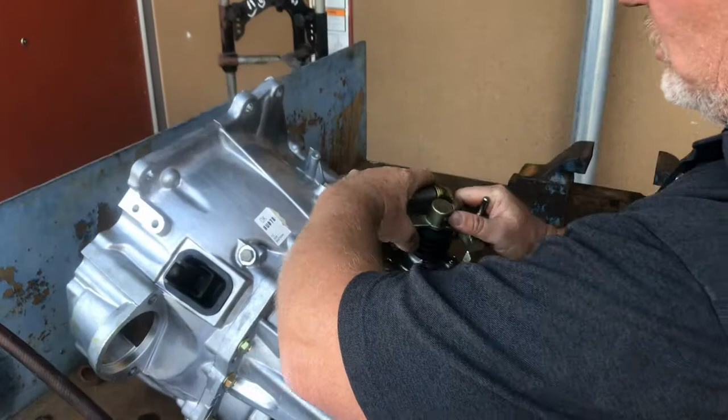So it's important before you start on any transmissions, identify neutral. So neutral on this one is up and down, and then you have your H patterns. So you go all the way up, you should be able to engage 2 gears. Let's see. 1, 2. You go down one more rail. 1, 2, and then down to the bottom. 1, 2. So we have all 6 positions.

Okay. So in order to start on this transmission, or any transmission, you got to make sure your shifter assembly is in neutral. So we're ready for that. This transmission right here has the shift fork and the throwout bearing connected. You can see how the manufacturer lubricated this. Okay, a lot of this is from my fingers, but you just got to pull this out. Okay, pull the shift fork out. Let me pop it off.

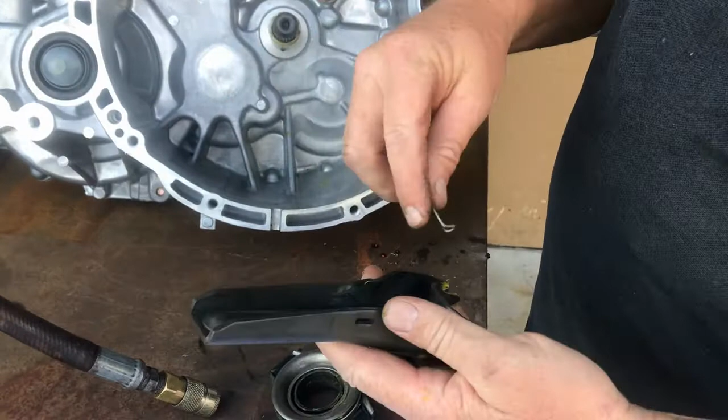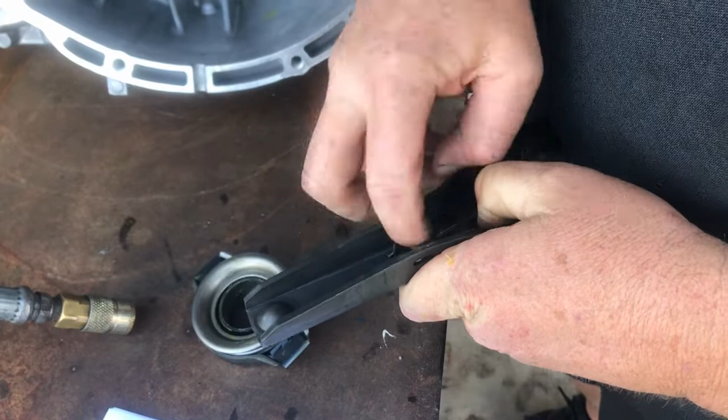There we go. And then the one thing I always worry about is students losing this spring. Okay, this spring is really important because that's what locks onto that ball. So I'm going to make sure that spring goes right inside so we don't lose that spring that holds the shift fork onto that pivot ball. Okay, so it just pops right in here, this ball.

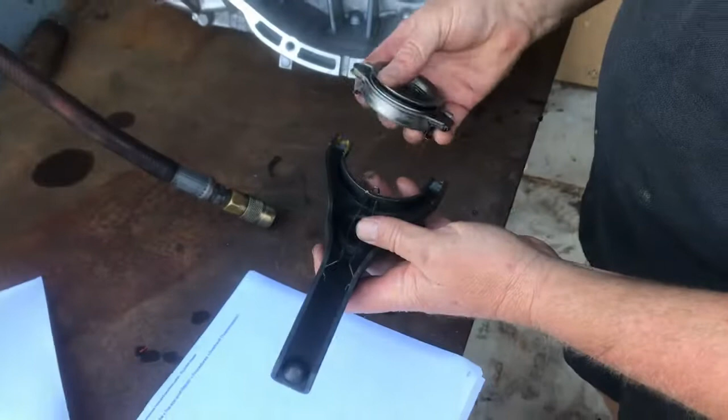Okay, and then the throwout bearing has 2 sides. So the side that will face out towards the clutch is this one. Okay, so that would be facing this way, and it just slides right on right here. And then we'll just put that out of the way. Yep. When it stops rolling.

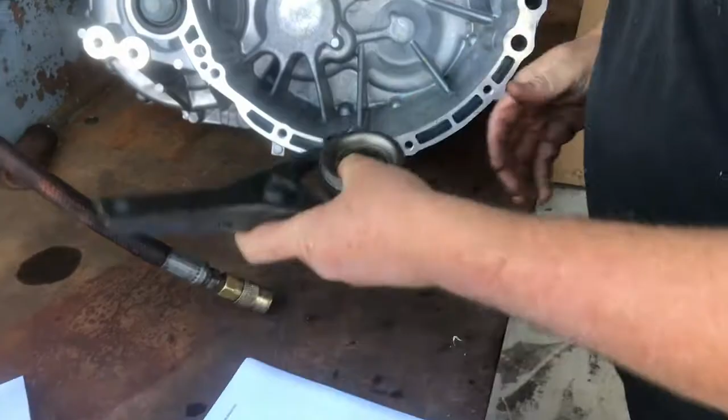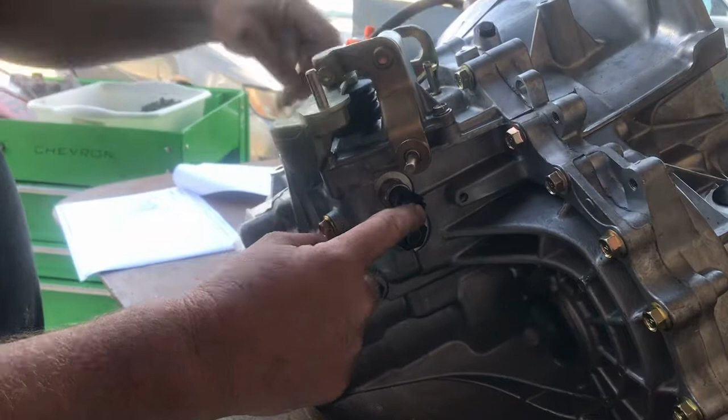So we have to identify some other things about the shifter assembly. There are stops. So this is like just a little pin that holds it in place. We also have a detent right here. We have a neutral start switch right here. On the top side, this blue one, this is your backup lights. Okay, so backup lights, starting switch, and then these are a detent, and then this is a detent up here. So detents are where you're going to have the spring and the check ball.

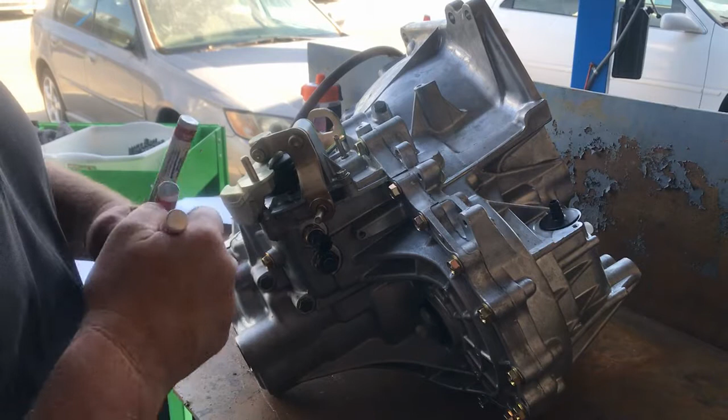We've got to make sure we identify these. And the way we're going to identify these is we're going to actually use paint pens. And so everything that comes out of this one is going to be yellow. Okay? Everyone that comes out of this one is going to be white. Because if you mix up the check balls and the springs, they're not always the same. And so that would affect the way it works and the way it feels. So this one right here is going to be blue.

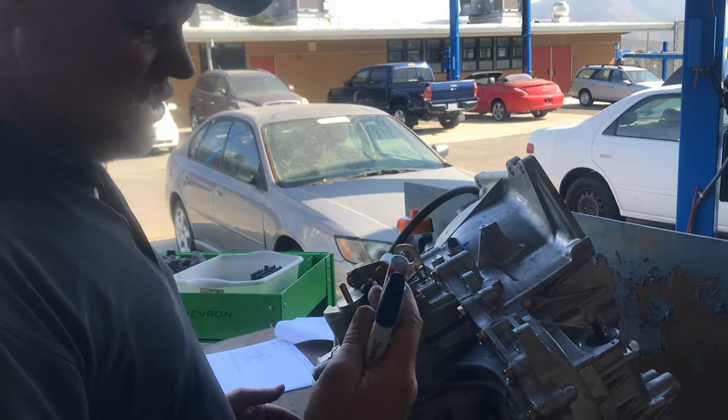Okay, we're going to use a paint pen a lot on this transmission to identify different synchronizers, different shift rails. These are really useful for the first time you ever take apart a transmission that you've never done before. You need to identify it with some kind of marking system so you know direction and you know which pieces go where. So really good, useful tool.

So now we're ready to take off that shifter assembly. So I'm going to use a 10mm socket and a 3/8 impact gun. And make sure we're in a neutral position right here, and we are. Okay. Now I will say I'm going to have to move it out of the way to get this one bolt. Get my safety glasses on. Okay. Everything's locked tight on this, and that's pretty common for transmissions. So, because it's locked tight, sometimes they're a little hard to take out.

Okay, so I got that done. Now I got to take out these other pieces. So I'm going to go ahead and grab a big wrench, take out my detent right here. So this one actually is, they're referring to this one as a shift check. That's what they're calling it, a shift check. Okay, so you can see it's a spring-loaded check ball, and on the instruction sheet it's right here, and it's referring to a shift check, and we're on step 3, remove the shift check and stopper bolt.

So now we need to remove that stopper bolt. 14. Yep. And I already have it loose, so screw that out. Okay, set these aside. We got to remove our, that looks like it is the park neutral position switch. So let's go ahead and get that. It's 21.

Let's get this out of the way. This is just a switch, an on-off switch with a little plunger. You could check it with an ohm meter if you wanted to.

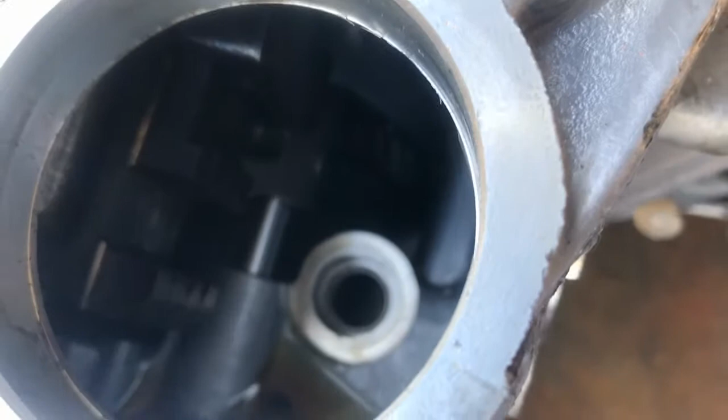Because this is in neutral, I should be able to lift this straight out. And there we go. This is actually what engages your shift rails through the gates. If you look down inside here, you'll see - let me get a screwdriver so I can point them out. These are your gates right here where I'm putting the screwdriver through. When you're shifting, you're moving up and down between each of these gates, and it looks like there are 1, 2, 3, 4 levels. I actually only shifted through 3 levels, so there was one I didn't find. Anyway, there are 4 levels here, so 4 shift rails.

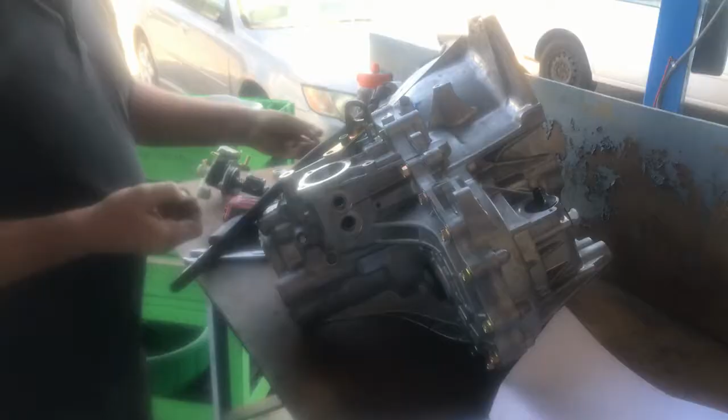Whenever I do a transmission for the first time, I always make sure to check that there are bolts of different lengths. To keep track of your bolts, and so you don't have pieces rolling around, screw the bolts back in - that way you know where they go.

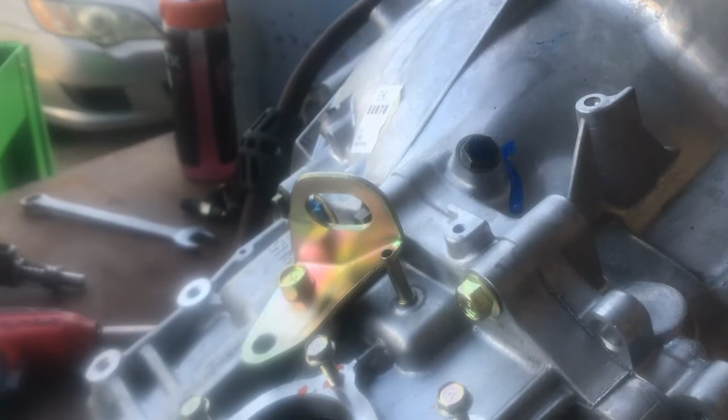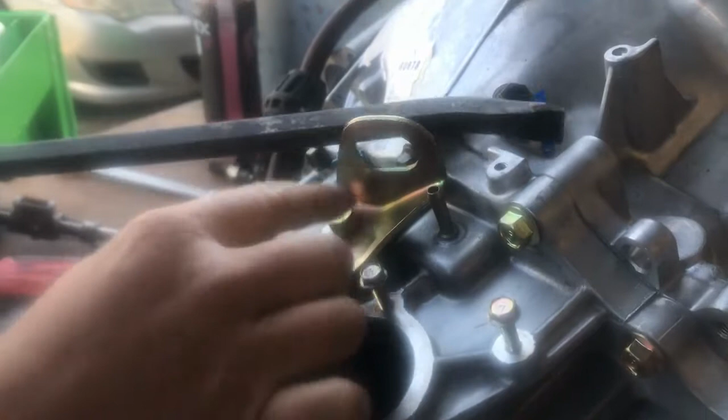I'm going to remove this bracket. We're going to have to separate these two cases, and I want to show you something - there's a really good leverage point, a prying section, right here with this bracket in place. So right here, let's see, yeah, right here we could maybe press. If I can't get this thing to separate, I might want to put that bracket back on so I can separate it, but I need to get it off to get out the bolts.

I'm going to screw that bolt back in and take off this other switch real quick. Need to use a socket. Let's see - no, that's not going to work. Hit stop or something. There we go. Okay, that was a little tight switch. Get that wrench off.

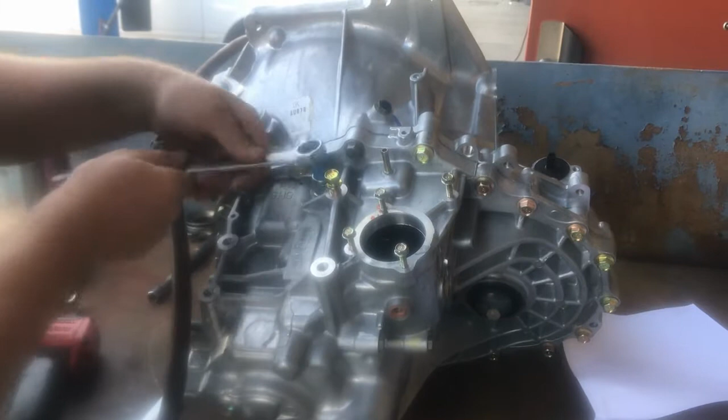We should be able to just slowly remove it. Again, this is for the backup lights. It's a regular on-off switch, just like the other one, with a little plunger on it. Wow, a lot of Loctite on this.

Okay, there we go, sticking this all in place. We're good. Now let's go see where we are in the instructions.

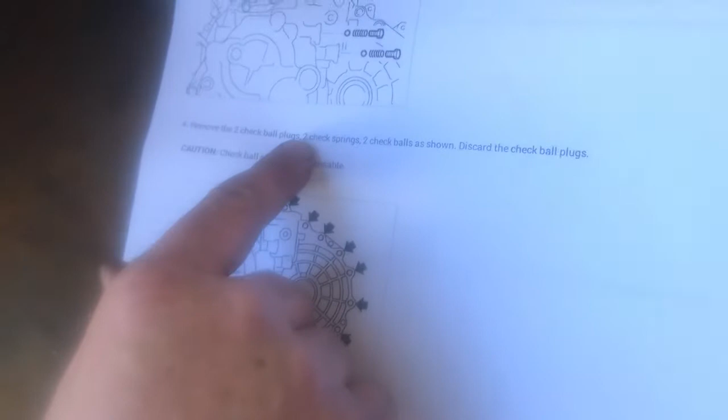I'm going to turn the page. Now it wants us to remove the check ball plugs, and the two springs as shown. Of course, if you're doing a rebuild, it would have you discard these - different parts depending on what the kit is. So we're going to remove those now.

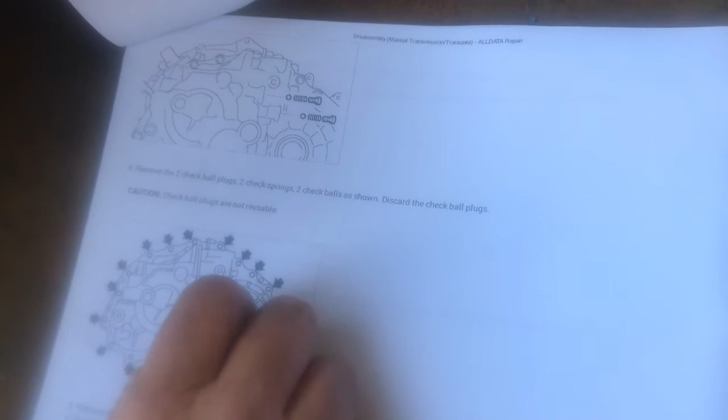It might be a 14. Yep, 14. Do one, and then I'm going to mark the ball and the spring with paint. And then we have the spring inside. Hit stop real quick.

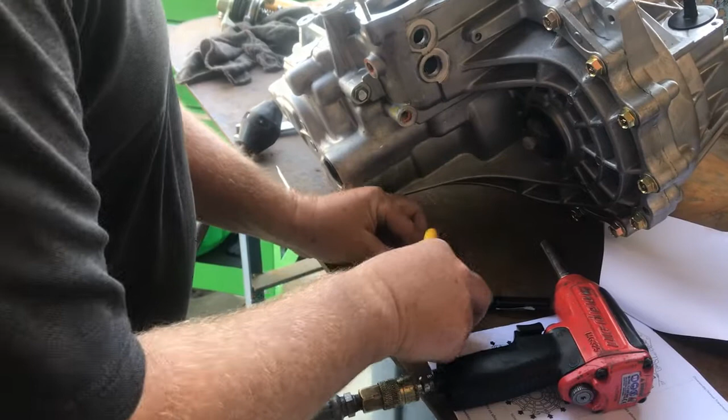Magnets are your friend when you're dealing with transmissions, because you can pull those parts out. Again, I want to mark this - this was the yellow one. I have yellow, so I'm going to mark these springs and the check ball too. Then you should put this somewhere safe, set aside so it won't roll around - somewhere in a rag.

So now let's do the next one. Get my magnet, my check ball - this one was the white one. That detent right there. You know, paint it white.

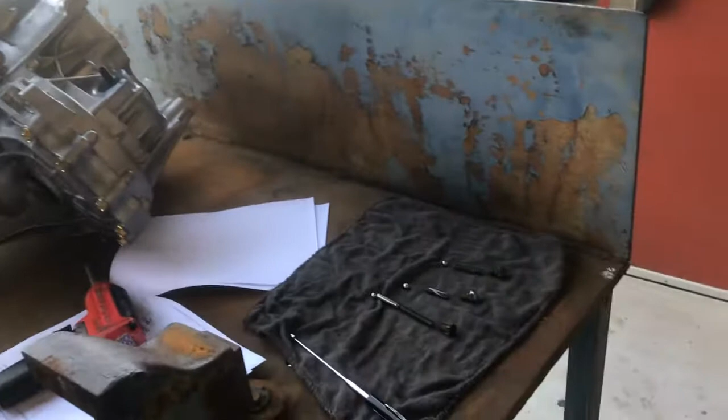All right, now we've got to do this top one. See, you can look and see - oh wow, look at that, it's blue from the manufacturer. Got lucky on that. But you'll notice - let's see, there we go - it's a little bit different of a setup. Now we're dealing with an interlock system in addition to a detent. This is definitely a different thing, and this is where students don't pay attention to the detail, and then they get the springs mixed up.

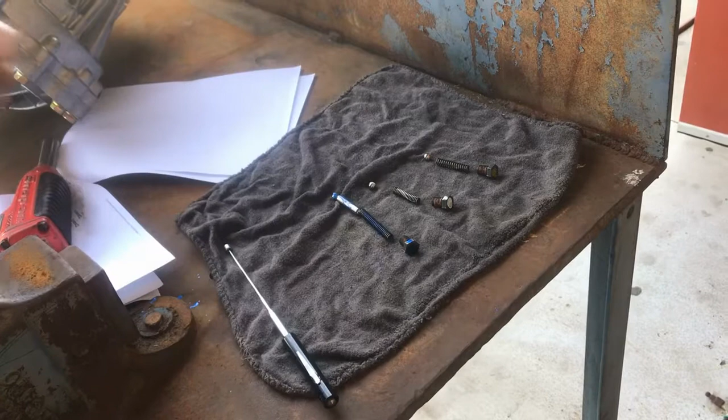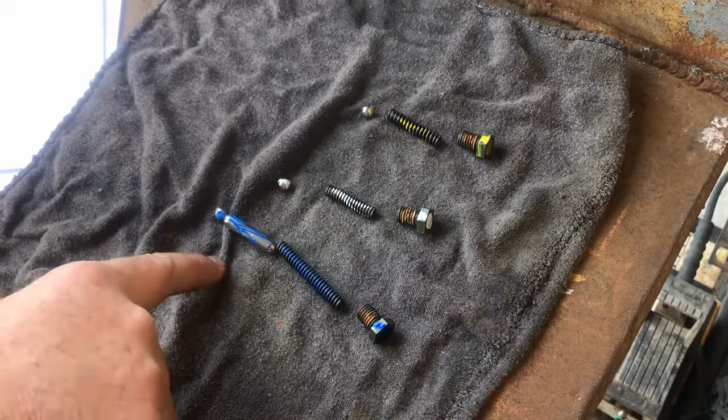They forget where this pin goes - almost don't even have to do that one. It's really important that we're consistent with our identification system with transmissions, because these are calibrated springs. This one's the shortest, this one's the medium, this is the long one, and this has the interlock pin. Really important we understand that.

Okay, we're ready to go ahead and start pulling this apart. I want to show you organization - organization is everything, because you're going to be taking apart a transmission that has probably 400 pieces inside it. You've got to have a method of identification, a method of keeping things out of the way, and a method of making sure things don't roll around, because the check balls will roll around. Rags work really well. Another thing that works well is tackle boxes - you could put these in the little slots used for fishing tackle. All kinds of different ways to organize.

And we are on this step right here: remove the transaxle fixing bolts as shown, and then we're going to remove the cover plate.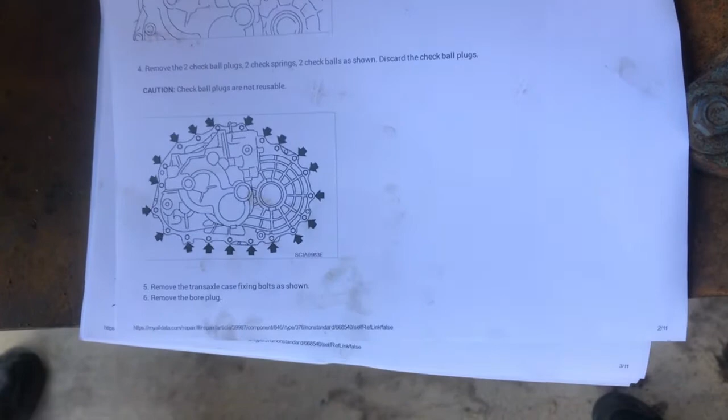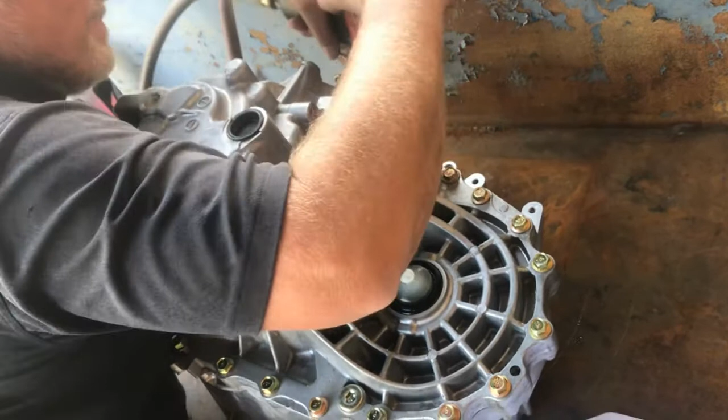One bolt here. There we go. An extension.

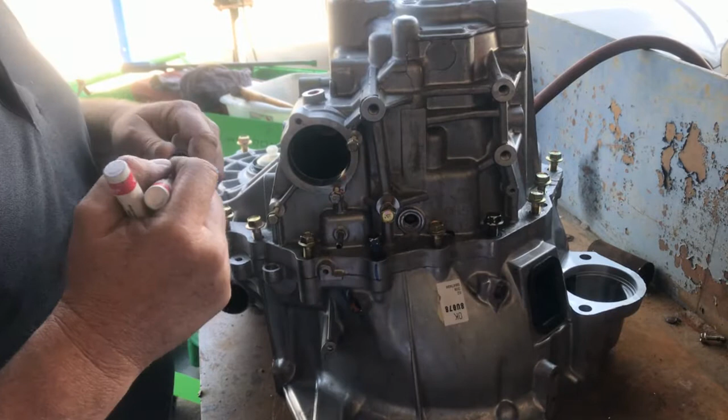On the back side of this transmission, this is really important I show you. I have two bolts that are a different color than the other bolts. Most people won't pay attention to that, but I do, because it's really important we get that right—those could be different length bolts. Again, use paint pens. If you think you have a different bolt, mark it. They might be a different thread or different length, I don't know, but there's a reason those are a different color or kind of bolt than the others. So just mark them, then pull them out and put them in a pile.

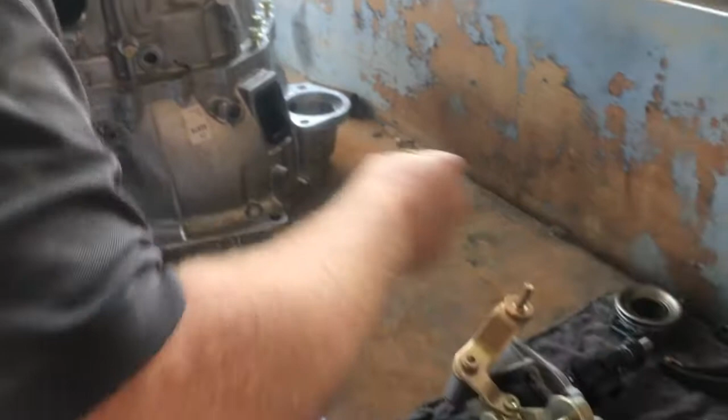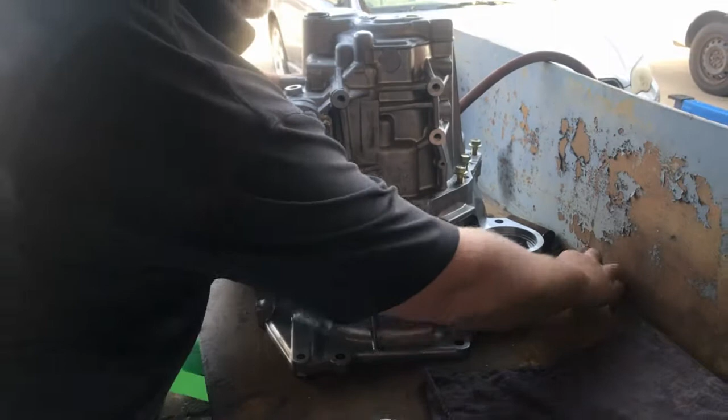Have an organization to them. I need another rag, looks like. So I'm on my second level. I might screw these back in, which is another possibility we could use, like I did with this one right here. So we could screw these back in.

Now it says to remove the plug. This is a plug right here that we've got to remove. I want to take a screwdriver and hit that in there. Might be able to—yep, I can twist it and get that out. And then inside here is a snap ring, okay? That's really important that we identify that, because that's one of the steps.

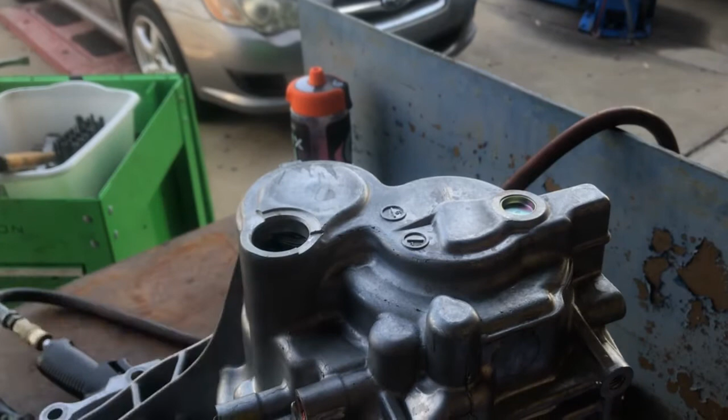If I turn the page, the next step is: while spreading the snap ring of the main shaft rear bearing located in the plug hole, remove the transaxle case. So I need to take a pair of snap ring pliers in here, and I need to—there we go, you heard it drop, okay? So what happens is when you expand that clip, the whole shaft inside here drops. So when you're going back together, you've got to support that input shaft underneath here. You've got to put a block or wood or something to hold that up so you can get this clip to go back on.

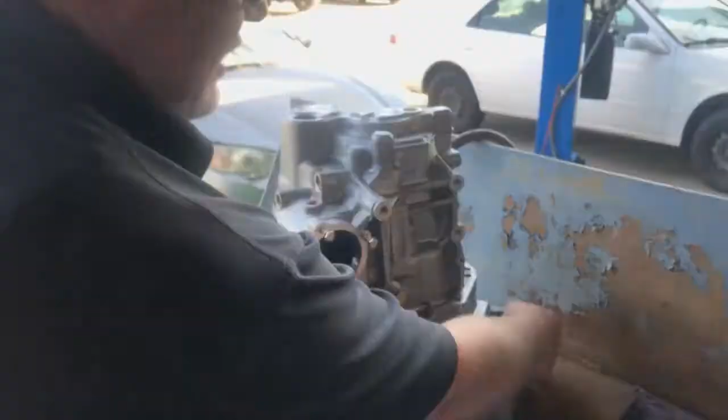Now we're ready to start separating this case. Let's see, here's a good place right here. Good. Never put anything where it mates the surface, okay? So we got that. Might need to—nope, that's still loose, so that's good. Spin this case around, find another spot. Right here. Again, you never want to pry inside here. Once you dent this aluminum, it's over. And then we should be able to go.

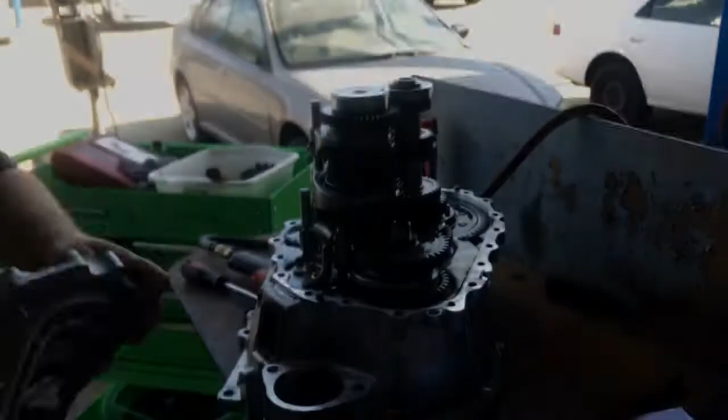There we go, and there's our shifter assembly, and any shims that fall out. These are really good to keep, by the way. Any shims that fall out—in this case, here's the shims—we've got to make sure those shims go back in the same place. So this one has a shim, that has a shim, no shim on the final drive here on this side.

So we have three clusters. Here's a cluster, here's a cluster, and here's a cluster. This is my main shaft, okay? I'm going to take this shim and stick it down inside the case right here, right where it's supposed to go. And then I can put this out of the way.

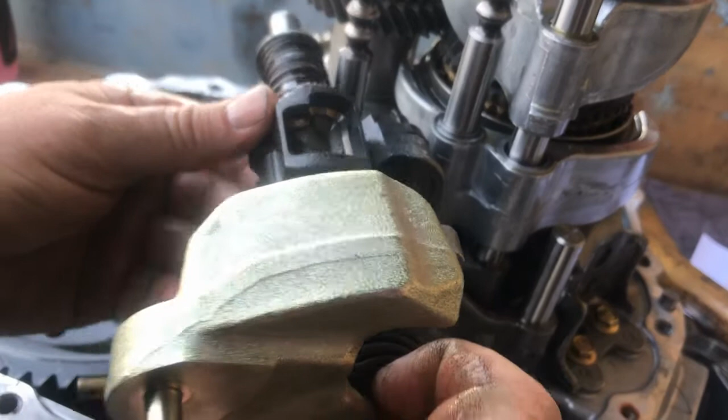Rolling. So right now we're in neutral because all the gates are aligned right here, okay? So when you put all these gates back together, this is what it needs to look like—it needs to be through. The reason why is when you put this shifter assembly in right here, you're going to be sliding this lever down inside here like this to install your shift mechanism. So this is how we engage different gears, by moving this and then sliding each gate up and down.

This is actually a 6-speed transmission. Reverse is over here, so we have a reverse gear right here. I'll shift it into reverse—that's reverse, you can see this one dropped up right here. So this lever goes up, and it moves a mechanism that pushes that down. Let's shift it down into neutral. Okay, so we're back into neutral.

This is first and second gear right here. You could see first and second gear because if you look inside, you've got a small gear turning a large gear. That small gear turns this large gear, so then first gear would be down.

That is first gear. The next gear is this one right up here, engaging this gear, so then second gear would be up, right there, that'd be second. So this one is down is first, up is second.

So let's go back. Okay, and we got to get it all in neutral because remember, we cannot move multiple shift forks. Third and fourth is right here. Okay, so we go up to this gear.

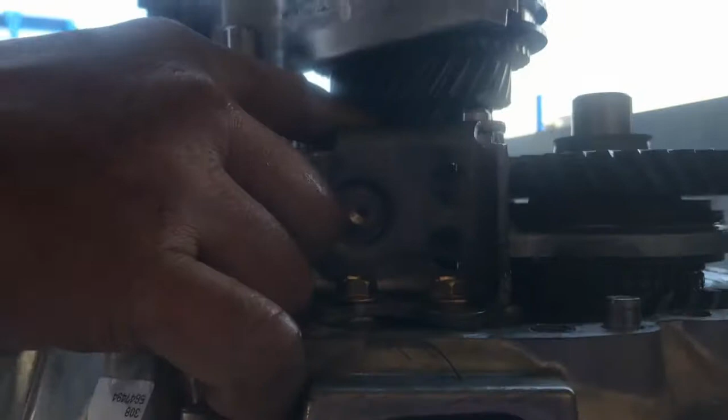This gear right here only transfers the power from the input shaft to this other cluster. So it's almost like an idler gear, this gear right here where I have my hand. Yeah, right here, this is like an idler gear, okay? So keep that in mind.

Third gear is actually this one. This is fourth gear, this is fifth gear, and then this is sixth gear, okay?

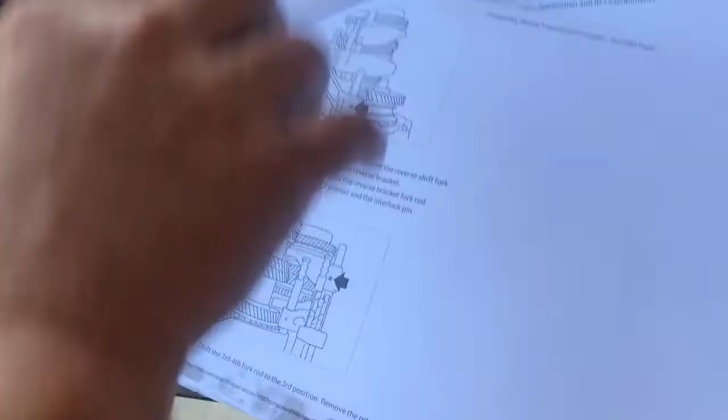So it's going to tell us to, as we follow the directions, shift it into third gear, which means we want to move this shift lever down on this one. Let's see, and sometimes it's going to take a little bit of force. With your transmissions, they've been apart before, so it's very possible that you won't be able to move these because these have all been taken apart.

So that is third gear right there. Neutral would be up. So third gear, fourth gear, neutral is in the middle, fifth gear, and then sixth gear it's going to be...

And this is where I need to use the... let's see, I want to be able to move that up. There we go, right here.

There we go. So it's all a matter of getting everything, all the synchronizers and the dog teeth aligned. So that's engaged right there. Okay, and let's drop - actually it's not all the way engaged. Let's do it one more time. There we go.

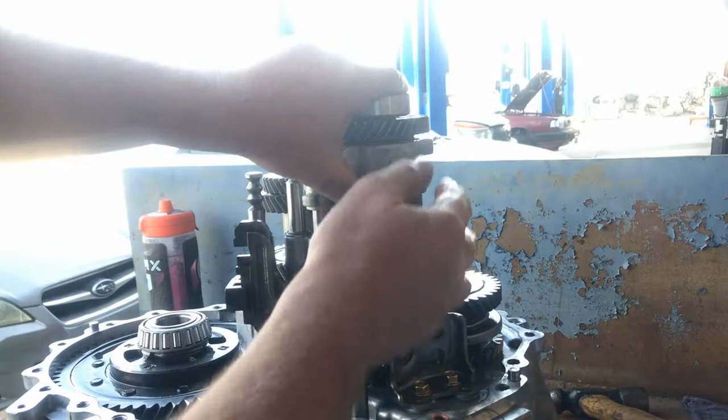So you can see how this gate right here is up. So this gate's up, this shift fork's up, and the synchronizer's engaged. So put it back into neutral, drop it down. So we always start with neutral, and then we go up and down depending on what shift fork we're moving and shift rail.

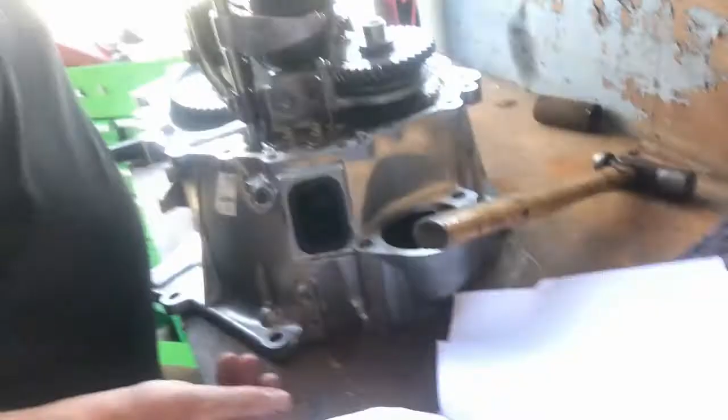So our goal today is to remove this, okay? So we're going to follow the directions as we go along. The first thing we're going to probably be removing is... we're not going to do all these steps for the bearings and the races, so we're going to skip all that, okay?

All right, so now we want to remove the shift lever right here for the reverse, remove the bracket and bolts for the reverse lever. So it looks like that we have maybe a, could be a 14, nope, might be a 12... yep, 12 millimeter. Get my air hose.

There's 1, 2, and then we can remove this whole bracket assembly. Let's see, should be able to. There we go, and then this will come off.

So, and you could see that this little knob right here goes on over the top of this rail. There is a little keeper here that goes inside the shift fork right here. Okay, so that goes inside the little lever right here, and we're going to set that aside like we've been doing all our other parts.

Okay, again, so we have an option. We could put these back in, or we could keep them separate, or we could mark them. I'm going to put these back in. You can see all the Loctite that are on these, and then we're going to go to the next step.

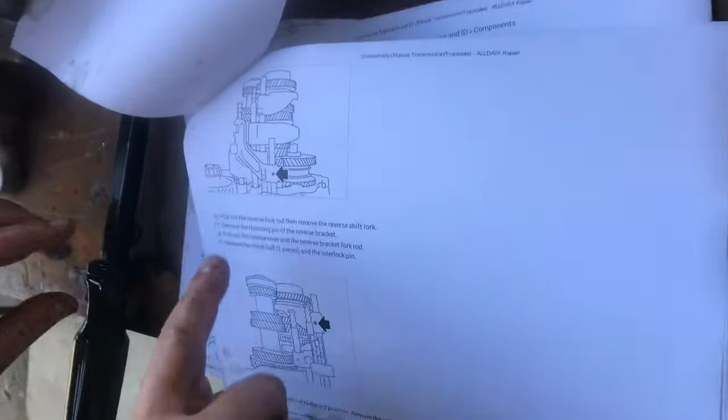So what it's referring to is, here's our reverse. We're going to actually pull that rod out right here, and then we can remove that shift fork.

Now here's the problem, everything is directional, so I'm actually going to use white on this reverse one - or this is the blue, sorry, I'm going to put blue here, and I'm going to mark the shift fork. This is top side, this is top side, okay? So I know now if I flip it around, this is going to be the way it's going to go, okay? So direction is everything.

So the next one I'm going to do is white, and then the next one I'm going to do is yellow, and then maybe I'll get the black pen.

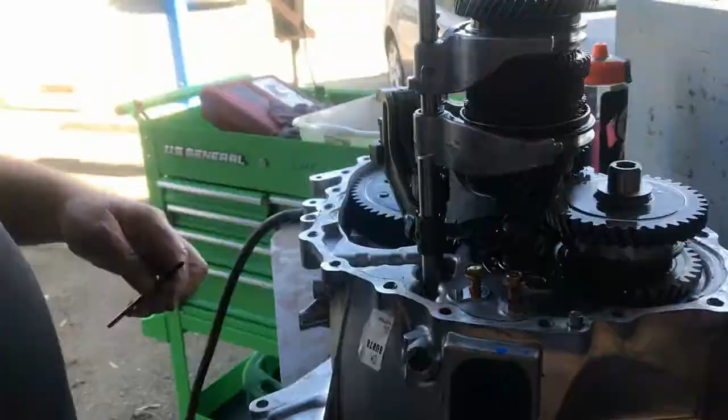Okay, so now I need to drive out the roll pin. You can kind of see I already have it kind of pulling out right here. Okay, you see right on top of my finger. So we're going to take this pin out right here.

Keep track of it, because you don't want it to go shooting somewhere and you lose it. And then always be aware these ridges are really sharp.

There we go. And I did exactly what I said not to do.

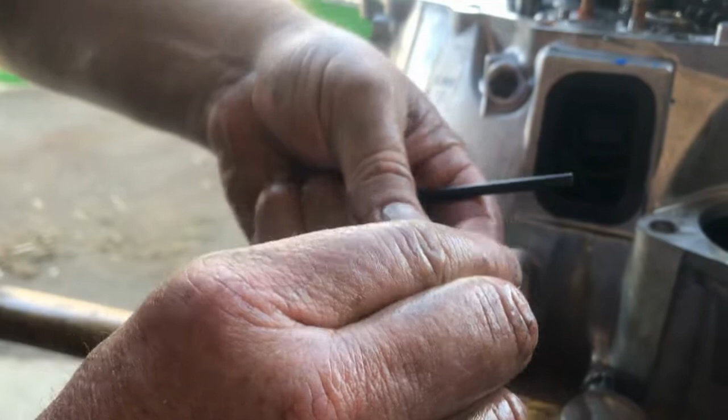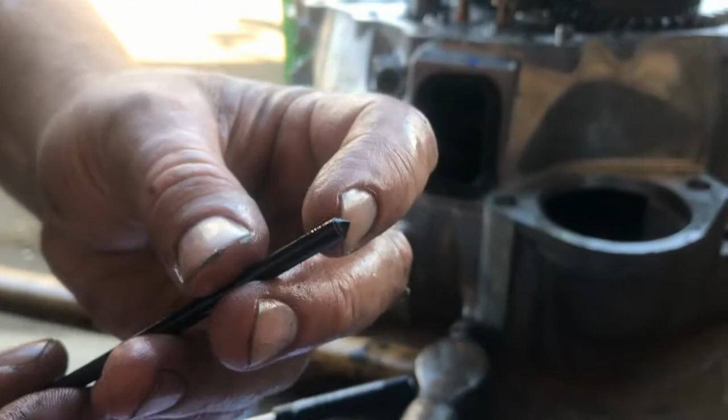This is where the magnet's really good to have, whether it's a pocket screwdriver magnet or just a regular magnet. It's a two-piece design roll pin, so one goes inside the other, just be aware of that. I'm going to put that over here for now, but I want to show you a drift punch, or the punch I'm using. As we get further, the sizes get more pronounced. These are like for roll pins, or you could use them for center punching too. Really cool set to have.

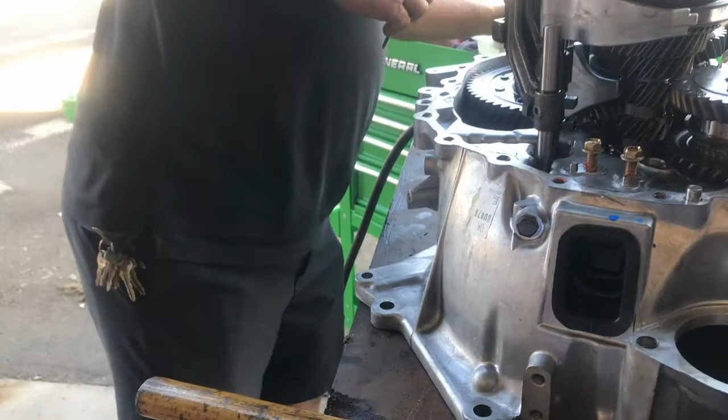Now I got this out, so I could go ahead and lift this shift lever off. But again, direction - I know this is related to that, and this is all reverse, so I'm going to mark this. That's the white one - I guess you should keep track of your pads. So white, blue, and blue, so I know how this all goes. Okay, so I'm going to go ahead and remove this if I can.

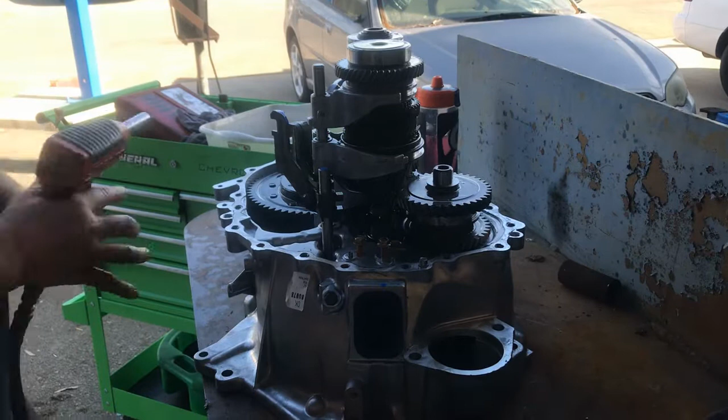Let's see, go ahead and- okay, so I need to really talk about this. I was trying to pull this out, and I can't pull it out, which means I need to do what I did with this: lift the pin up. By lifting the pin up, we can remove the pin and this bracket assembly.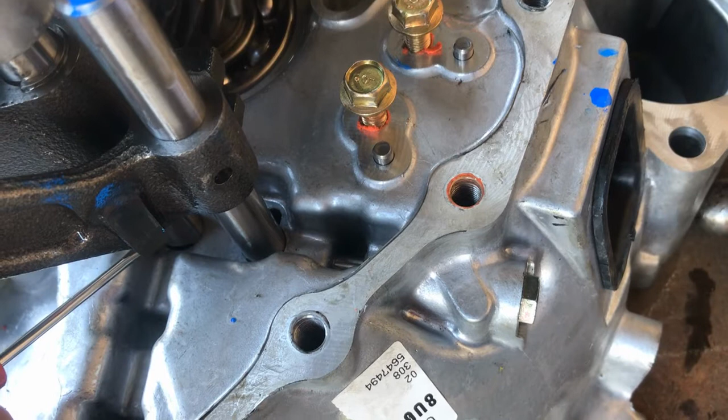Now here's the problem - this is the detent right here, and this detent is really complicated. If you look inside, and I'll use a pocket screwdriver, this detent has a spring right here, then one of those rods, then a check ball, then a shift interlock pin. Between this rail and this rail is a shift interlock pin, but there's a check ball inside this rail, a check ball inside this rail with another locking pin. So it goes: pin, check ball, pin, check ball, pin, and then rail with another pin.

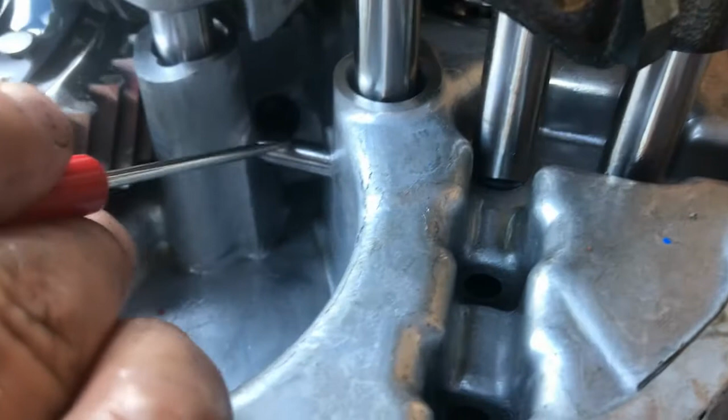This is the most complicated detent and interlock system I've ever seen. So here's a pin, you have a rail, then another pin, check ball, pin, check ball, pin. We're going to be talking about that as we pull it out in stages. So let me go ahead and pull this up.

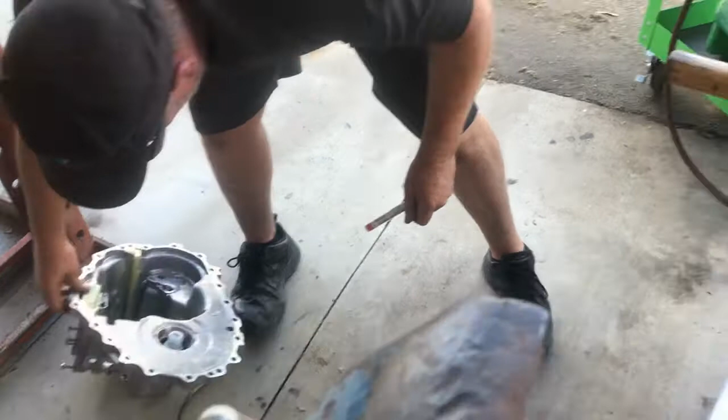So this is the top side of the transmission, the bell housing. I already have a blue one on top, so I'm going to reuse the white one again. The other white one I used was on this side of the case - you see I have a yellow here, and then there was a white, so I have no problem using white again. I'm going to mark this white right here, and then we're going to use the plug - it's in your hand, oh yeah, here we go. Mark that, and then let's pull these pieces out.

So here's the spring, and then we're going to take out our pin inside here - there's the pin I was talking about. Okay, now I should be able to take this out. Let's see, might be another check ball in there - yep, there's a check ball.

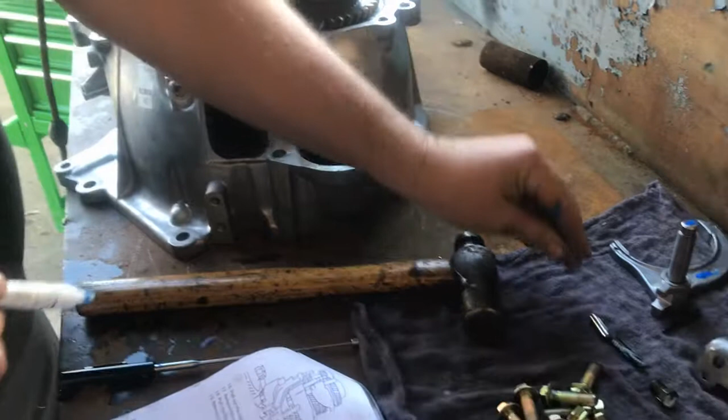Mark that white. Now let's see if we can pull this out. Like I said, these guys are really hard, and you can't force it. I've had a couple transmissions where students were hammering on these and mushroomed the heads, damaged them. When you're hammering on these to get them out, that check ball is being forced into an aluminum case, and it dents the case. So either you finesse it, wiggle it, and if it doesn't go, you just keep playing around with it until it does go.

All right, let me get a pair of pliers, and I'm going to protect the jaws. Again, these are all really machined pieces, and you wouldn't want to use straight jaws on any of this. Now I have this piece out. I'm going, okay, what's top side? Well, there's the top side - there we go.

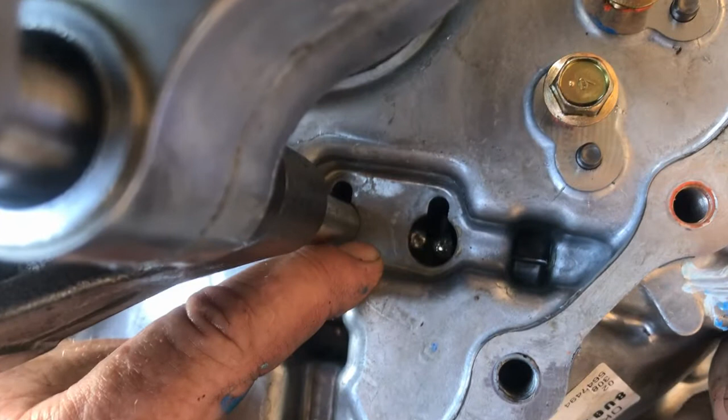And then I could put that little pin right here, so I know where everything goes. I have a plan. I see another pin inside here - you see that little pin right there? There's another one, so I'm going to pull that out. You'll see right here, come back over here, Jordy - you'll see my magnet, and then there's one check ball, two check balls, and then another pin.

Okay, that's why this setup is so hard to do.

So in between this check ball and these two check balls is a shift rail. And then you have another check ball and a pin and a lock pin right there. Really challenging to get that all right.

This is where I'm going to have you stop, and then I want you to reassemble. We'll do the other clusters later, but this is enough for one day, and I want you to reassemble this for Thursday's class. Then the following week, we'll focus on these shift rails.

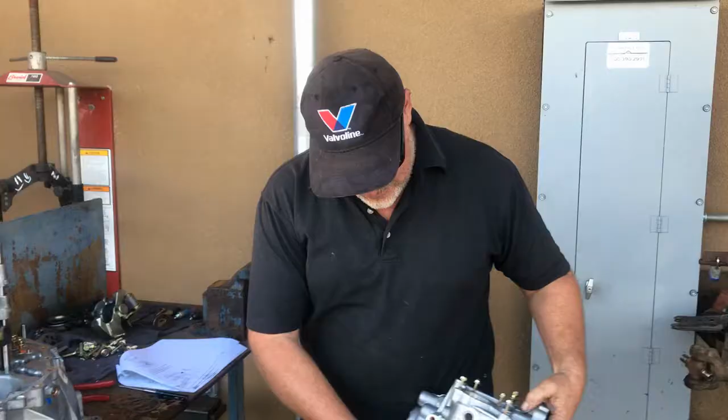Rolling. So the person I'm working with, Mr. Lear, brought up a really good question. We had this top part of the case that fits over all this, and we had those two detents that we had to remove initially.

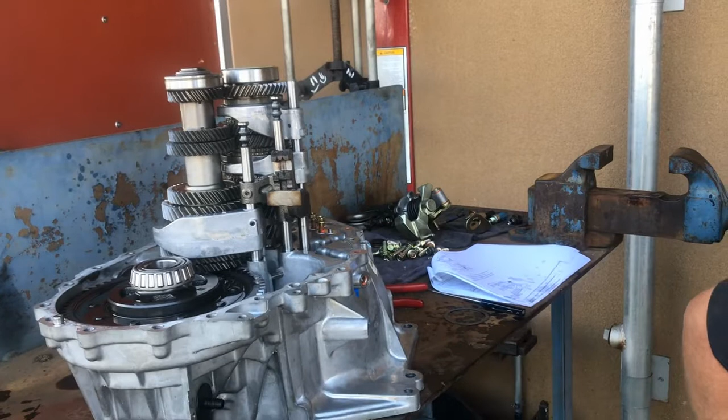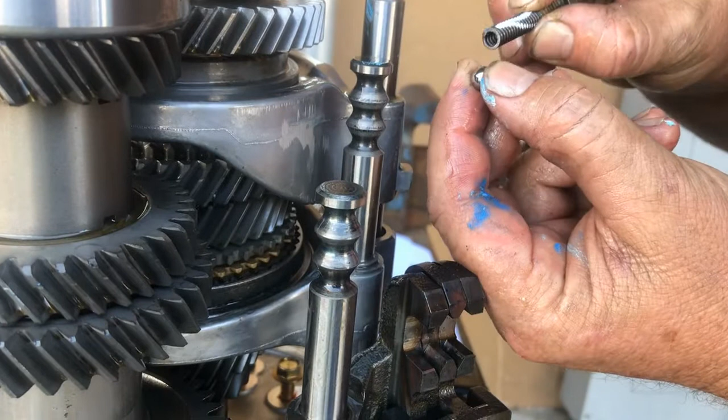He was wondering what these areas right here were for on these shift rails, and those are where the detents go. So that detent sitting in that case had the spring and the check ball right here, and that is the neutral position. Then this shift fork would go up—this is a 3-4, so up would be fourth gear. If it went into this one, the rail would go up, this would go down, that would be fourth gear, neutral, and then this would be third gear.

This one right here is neutral. Down would be first gear, so moving the shift fork down would bring the detent up here to first, back to neutral right here, and then down to here would be second gear.

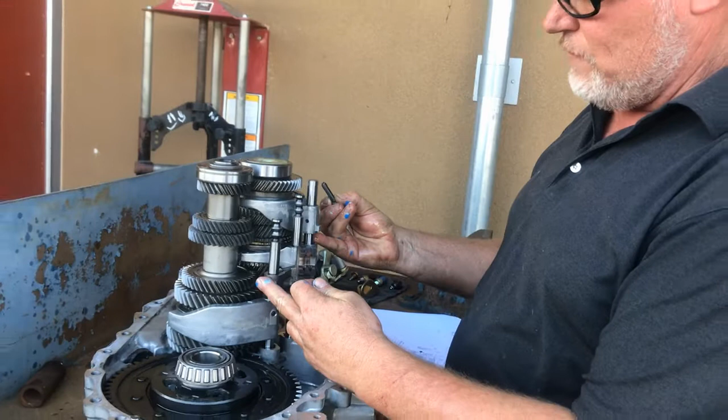So you had to remove these two detents to remove the case off of the whole cluster in the shift rail assembly. This rail did not have any detents in the top half, neither did the reverse have any detents. That's why you only had two detents to separate the case.

But with the bottom rails, all three of these rails—1, 2, 3—are dependent on this detent and this detent. Really complex system.

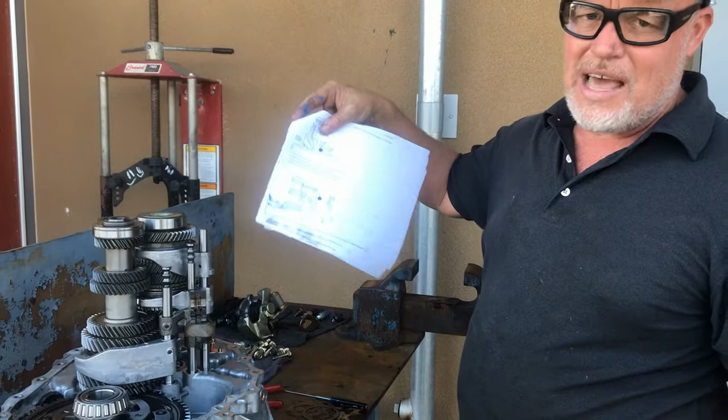You can see how these bores intersect and merge on this one rail right here with these two detents. It's a very complicated system, and I can't stress enough being organized in some way to keep this straight in your head, because I guarantee you the manuals don't make it very clear, so you've got to have a system to make it clear for yourself.

Rolling. So this is the reverse gate and shift rail, okay, that went into actually this slot right here. Remember, I told you this is a very complicated detent assembly, and what I want to do is bring this up.

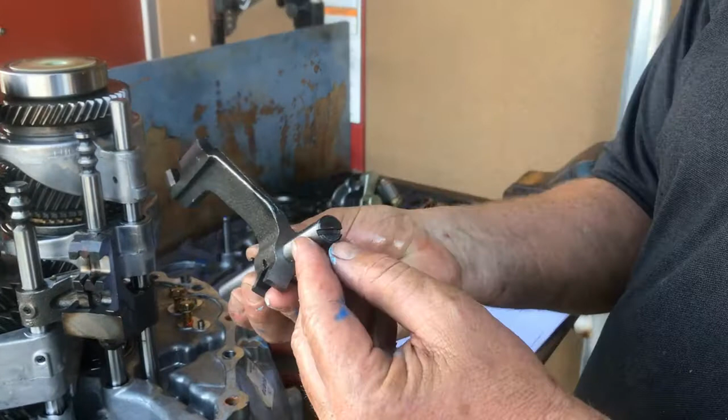I wanted to show you this offset slot on the bottom of this, and a lot of students don't even pay attention to this little detail. But what that means is this pin can only sit in this rail in one position, so that way the detents work properly. So let's see...

Looks like this needs to go—the detent's going to go into these notches right here. So the slot's going to be facing over to this side. It's really important we get those slots in the right position so it drops down all the way.

Rolling. So I put this gate and shift rail back in. I wanted to show you how to get the roll pin hole lined up. When you get it lined up, that assembly should be in neutral here, and then you should be able to insert this pin.

If you don't have that slot on the bottom of the rail in the right position, then you would not be in neutral on the shift gate, and you would not be able to get the pin in. So again, you don't want to force anything—you want to align everything.

I'm in neutral, the roll pin holes are aligned, and now I could drive that through, and this pin and the slot on the bottom is properly placed, and the notches inside are set up for my detent and spring to go in and engage. Really important that we pay attention to those kind of details.

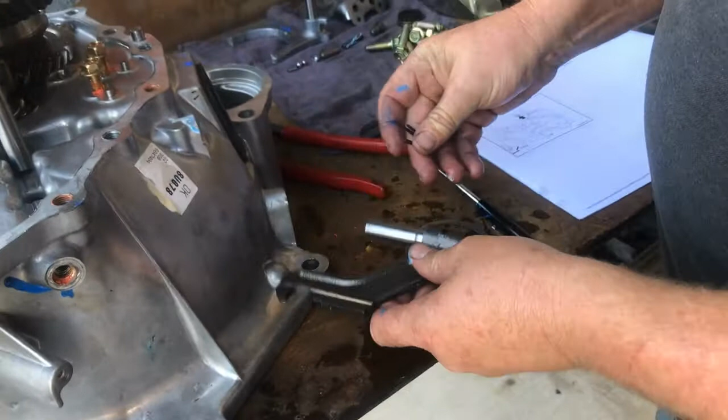But we never want to force things. We want to just understand things and pay attention to every little detail you can. This is what separates a transmission tech from most technicians—there's so much detail with transmissions and little pieces that most mechanics end up saying, 'I don't want to bother.' So if you're organized and you have your mindset right, anyone can do these.